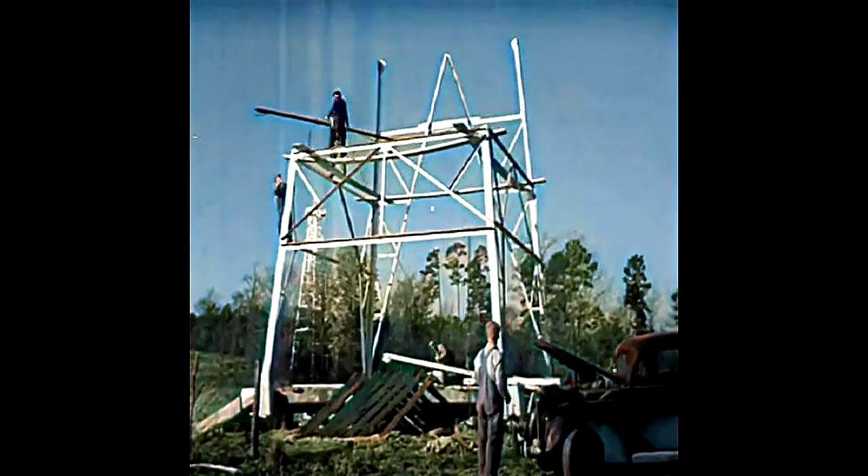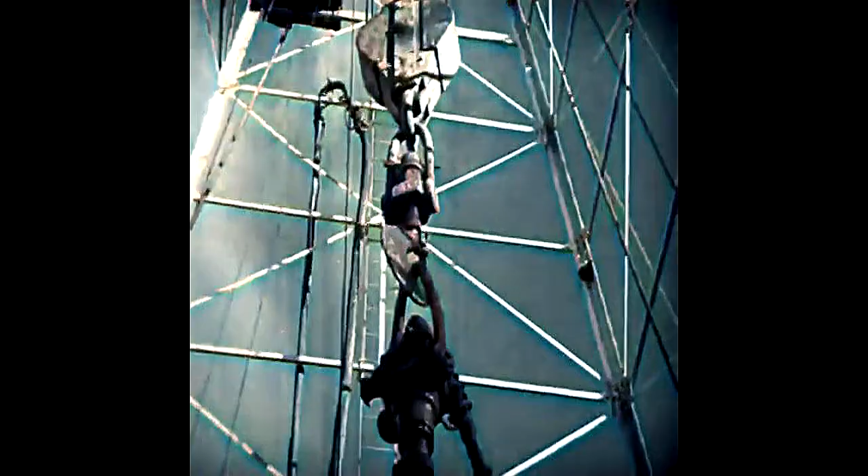A cellar is dug, and a rotary table to turn the drilling stem and the bit is set in place. Round and round the rotary goes, drilling deep down to oil. A steam engine drives the drilling mechanism. They're inserting a length of pipe, lengthening out the stem for deeper drilling. A new joint is waiting.

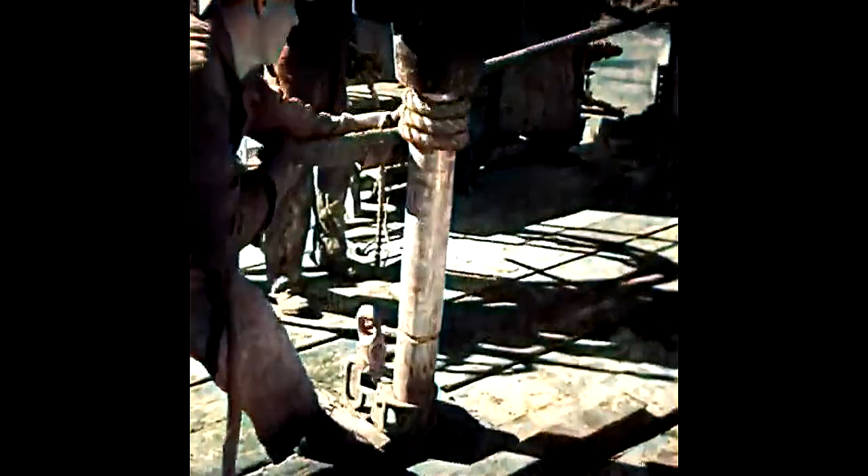Oil field workers are called drillers, roughnecks, roustabouts, rope chokers. The oil field treats our ears to odd and colorful names. Now the drilling stem has been lengthened, then round and round once more.

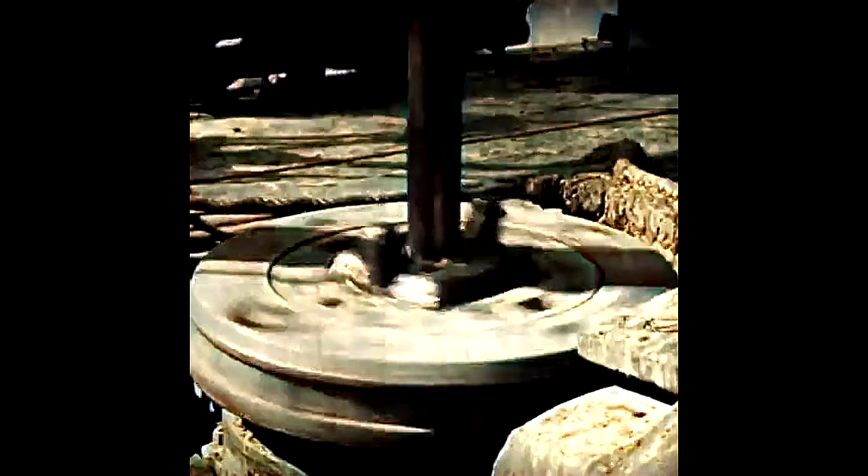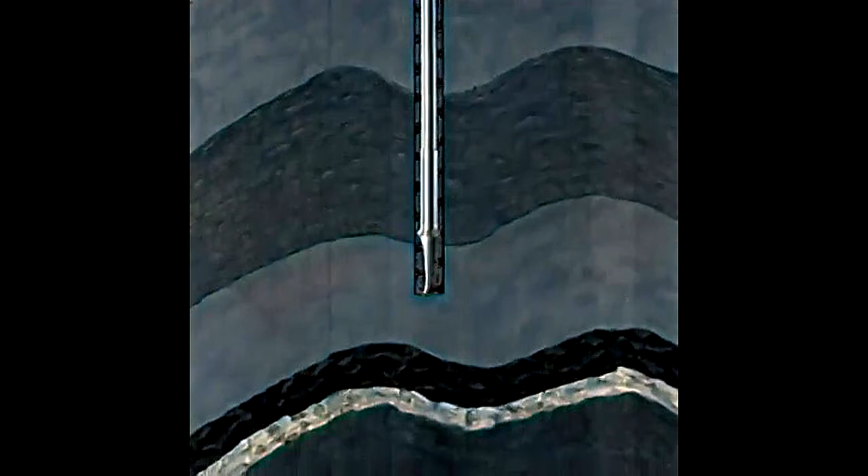Down through layers of sandstone, shale, limestone, down to astonishing depths. This well 5,000 feet. Some 10,000, 2 miles into the earth. And then, after weeks of drilling, fighting against natural obstacles, the drill at last reaches the oil sand, porous rock, which holds the oil much as a sponge holds water.

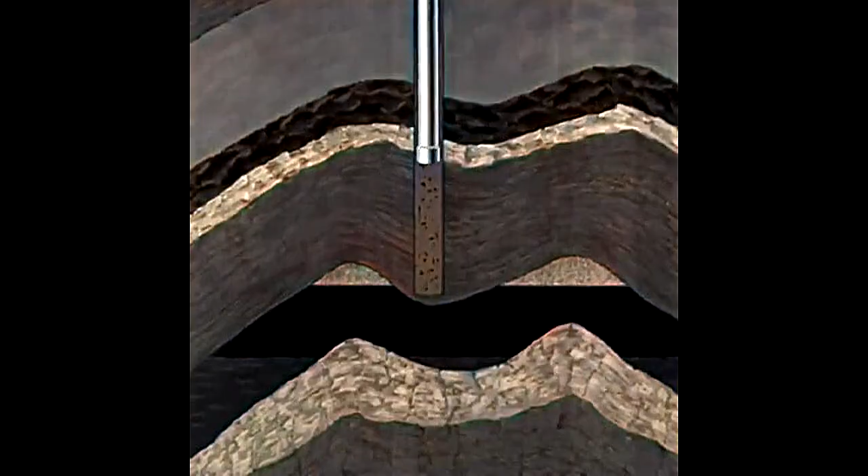Next, the casing is lowered to the bottom of the hole and cemented in position. Then drilled through the oil sand, and a screen is installed at the base of the casing. The screen extends down into the oil sand. The oil flows through the screen, up through the small pipe tubing to the surface.

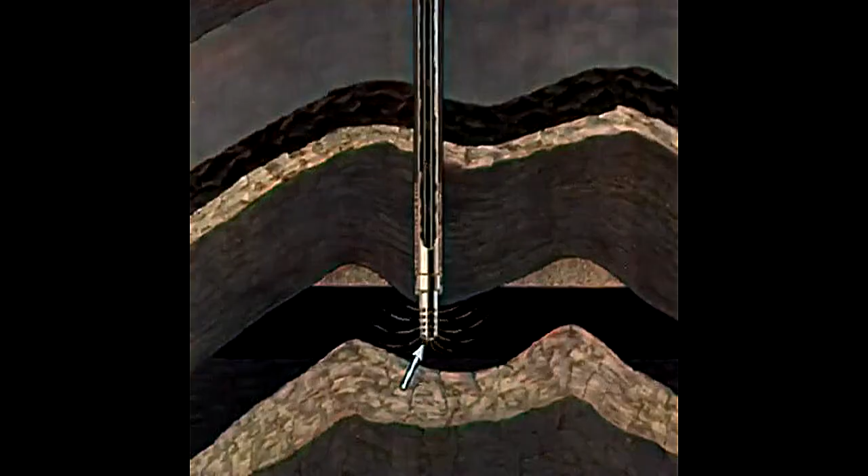So they've struck oil, and now the well must be cleaned of the mixture of drill mud and oil. Some wells flow of their own pressure. Others must be pumped, need power.

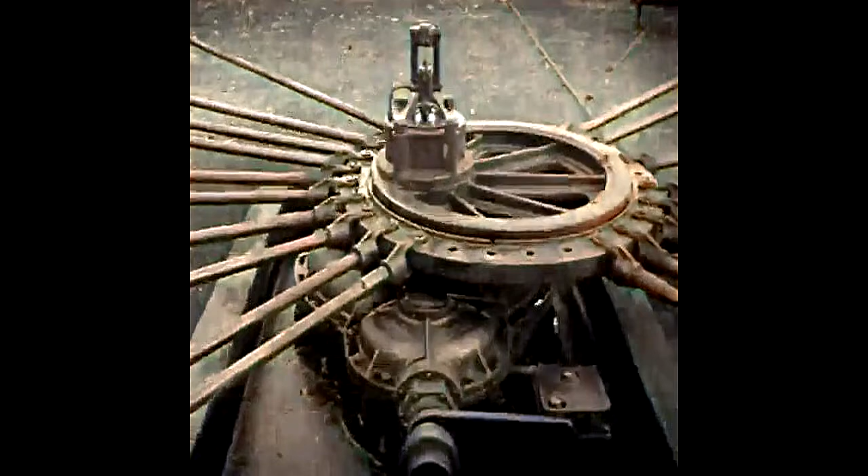The power is transmitted to groups of wells, the ever-swaying rocker arm, the rhythm of pumping, the unceasing heartbeat of the oil fields. A 24-well hookup is the height of oil field power, pumping black magic from 24 drillings in the earth, all at the same time, out of the ground.

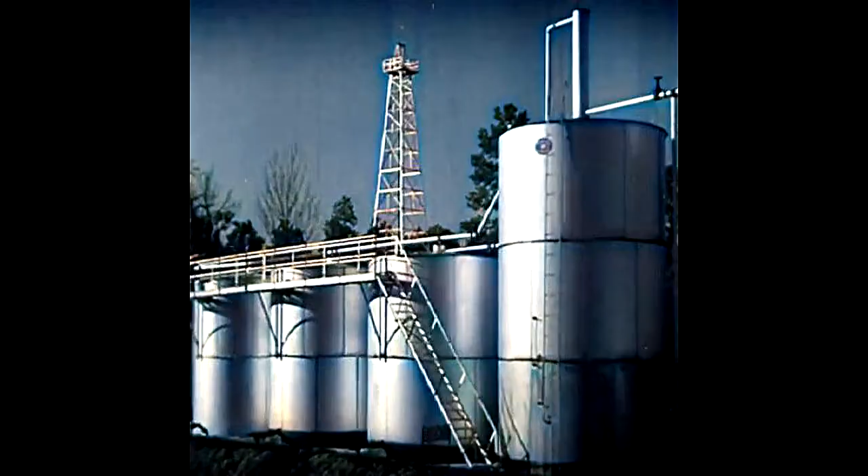The oil is cleaned of natural gas or water, which is combined with it. Next, the petroleum starts on its way through a great network of pipelines. There are powerful pumping stations every 40 or 50 miles to keep it moving along the lines. The lines of pipe, alive with racing oil, run through forests and over plains to these silver discs.

They're storage tanks where the oil rests briefly before it rides the waves in giant tankers, masterpieces of shipbuilding, those tankers of steel. The largest navigate the sea at 15 knots and carry 5.5 million gallons of oil. The voyage of oil to the refineries.

The refinery with its modern structures, technological towers, minarets of science, docks, office buildings, pageant of industry. Day after day, there is an endless flow of oil as the tankers discharge their liquid cargo.

Unloading oil is a vast operation of piping through huge hoses. Discharge pipes on the vessel and receiving lines on the dock are connected, and a cargo of 5 million gallons is discharged in less than 24 hours.

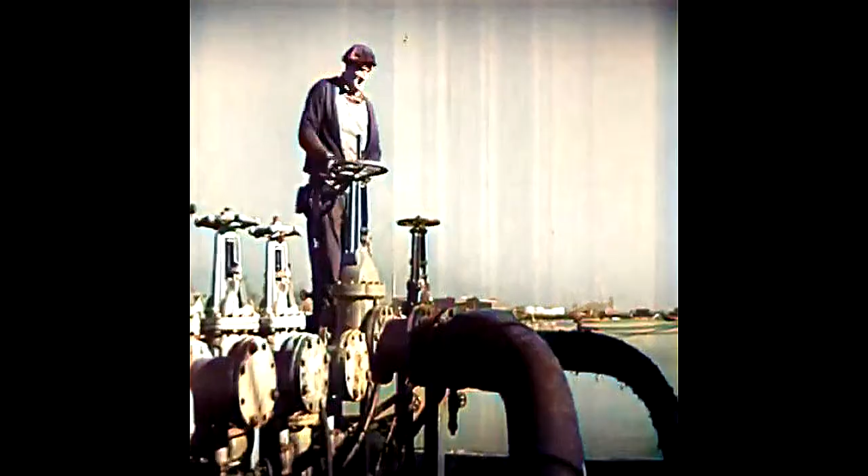No two cargoes of crude oil are alike, so each boatload must be stored in different tanks, and each batch must be processed individually, with laboratory tests to indicate the precise treatment for each.

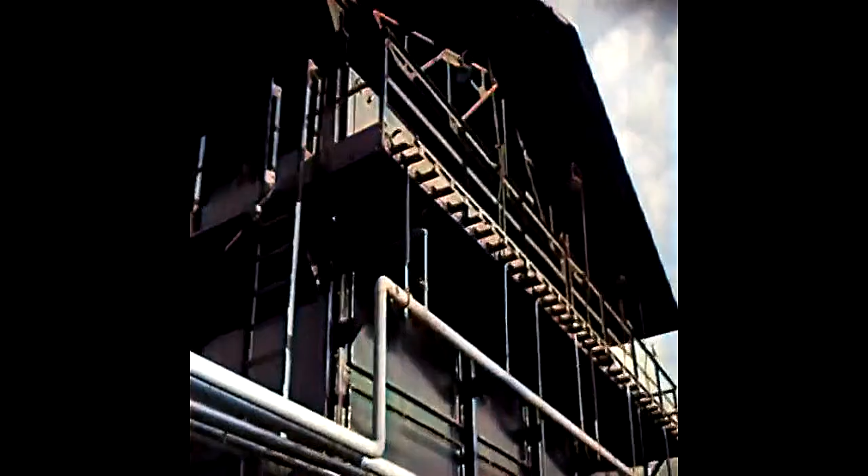That is embodied science. Those masses of strangely wrought steel, forests of stacks, glowering and hissing boilers, leaping and winking fireboxes. Intense heat, the flames roar in the furnace, yet the oil flows so fast the heat does not scorch it. And scientists wrest from the crude petroleum its tremendous power in the form of gasoline and other fuel oils.

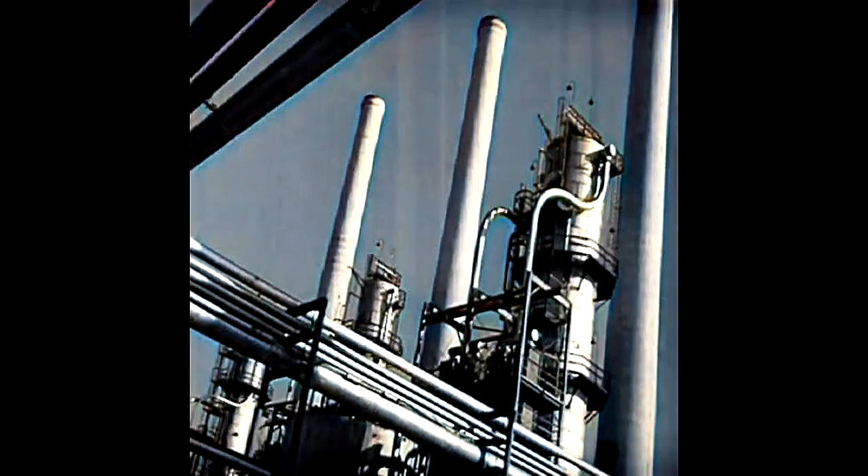And that's done in these towers called fractionating towers. They divide crude oil into the lighter and heavier parts. Those of different boiling points liquefy at different levels in the towers. Some lighter than gasoline liquefy at the top. Heavier parts liquefy further down. At the bottom are the heavy fuel oils, or the raw materials from which lubricating oils are made.

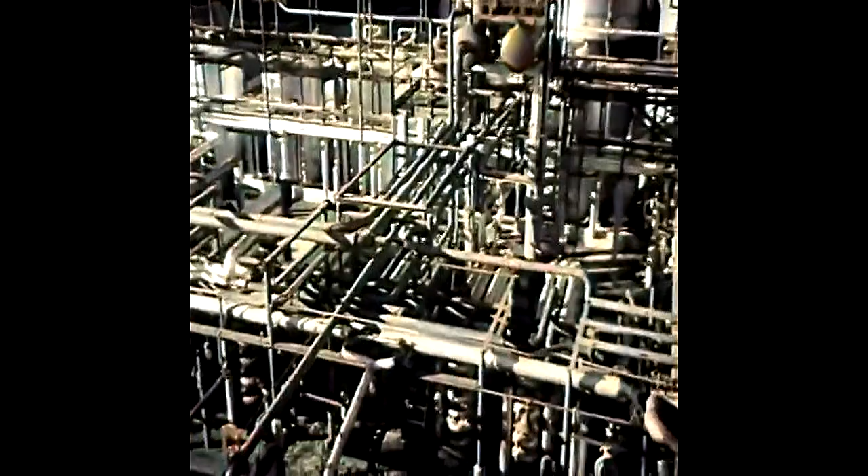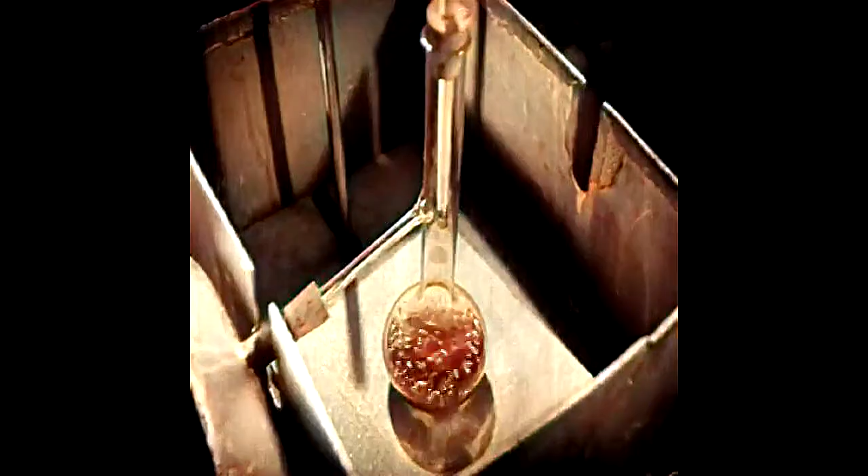When increasing use of motor cars pyramided the demand for gasoline to extraordinary heights, scientists were called upon to devise new methods. How could a greater proportion of gasoline be extracted from the crude oil than that obtained from the fractionating tower alone? To meet this challenge, the scientists turned to products other than gasoline which are drawn from the crude, studied their molecules, and found a way to change them, to turn them into gasoline.

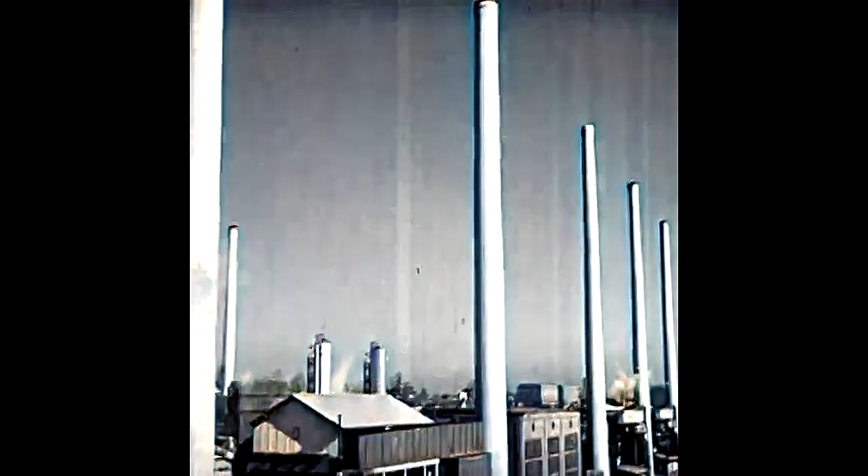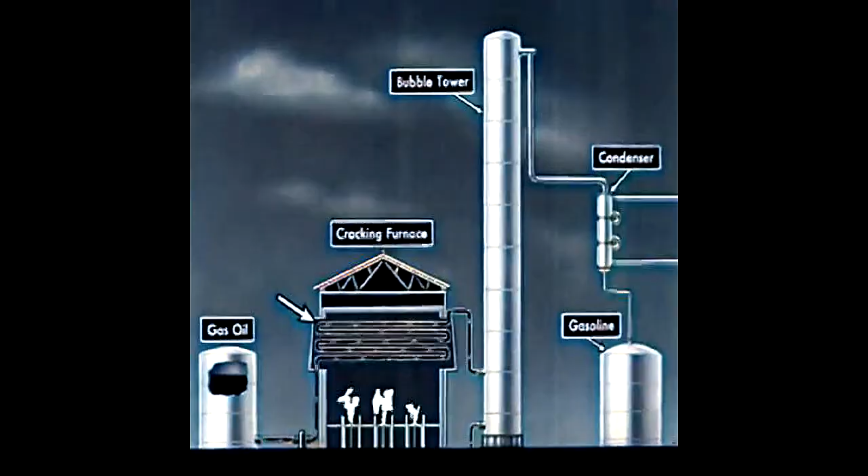The result was cracking. Let's look at a diagram of a cracking plant. Here we see how one part of petroleum that is not gasoline is converted into gasoline. Called gas oil, it is pumped through a pipe into a cracking furnace, heated to over 900 degrees under tremendous pressure, and the individual particles, molecules, are broken into smaller molecules, just as coal is broken under a hammer.

If we could see one of those molecules, it would look something like this. The hotter the molecule gets, the faster it wiggles, until finally it wiggles so fast it flies apart. The pieces shoot around at great speeds. They eventually find partners and form new and smaller molecules that look something like this.

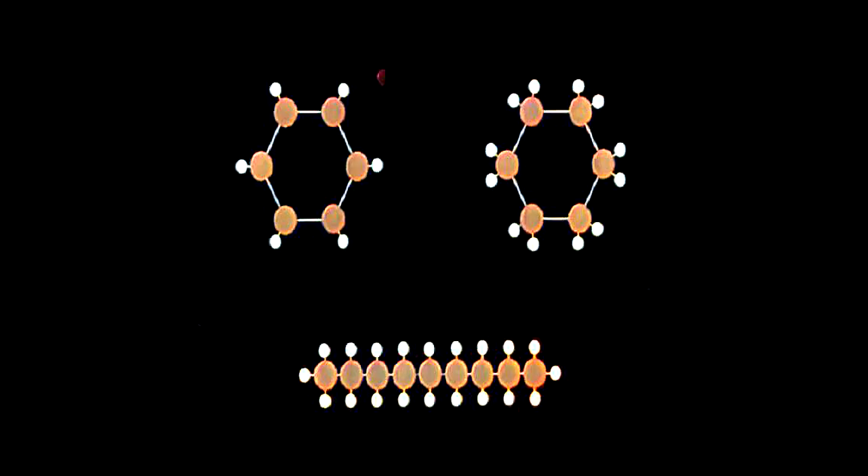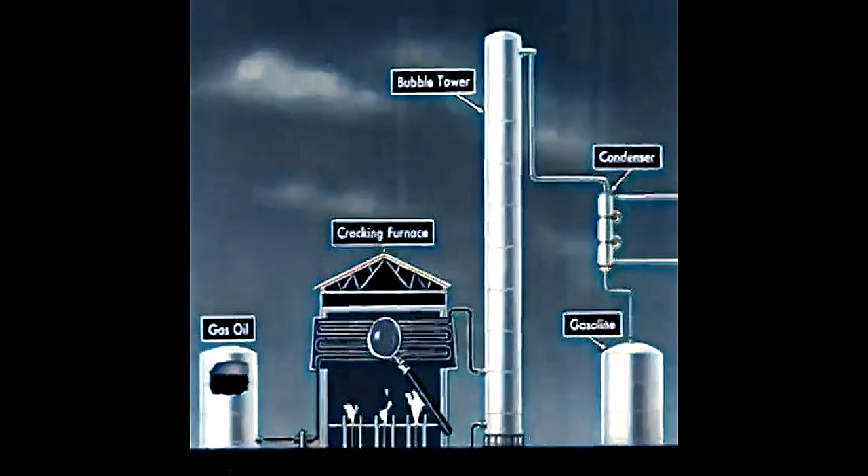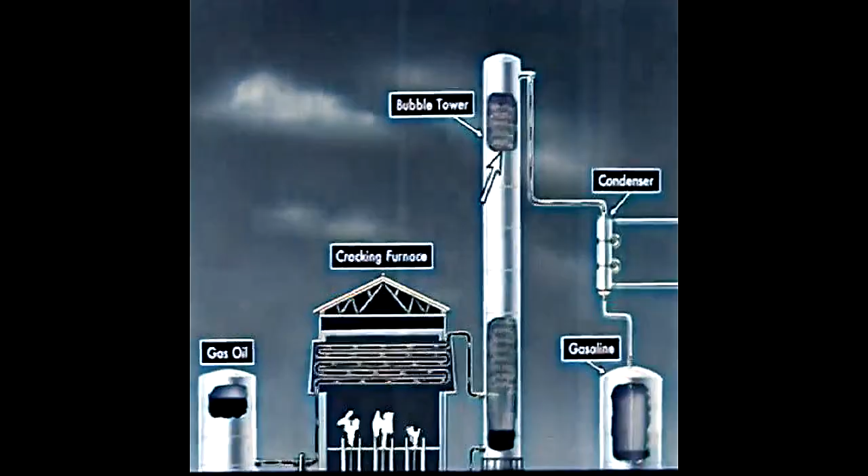These smaller molecules are now no longer gas oil, but are gasoline of high-powered, knockless quality. Some of the gas oil molecules do not fly apart and must be separated from the gasoline. This is done in the bubble tower. Here the big molecules, which are not gasoline, are held back and come out at the bottom as a liquid. The gasoline goes up the tower as a vapor, comes out at the top, and is condensed into liquid gasoline.

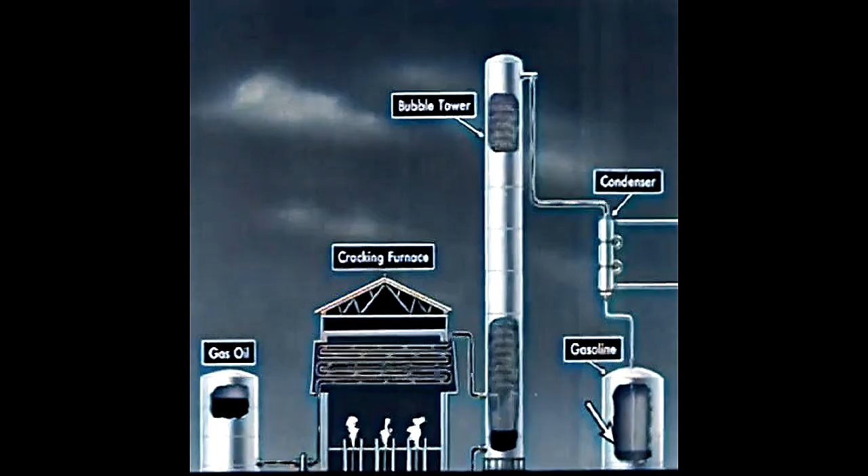Gasoline that gives more power to you. Experiment is the key to it all, and this is the experimental laboratory. In the making of powerful motor fuel, the control of temperatures is of extreme importance, and it is measured to an accuracy of 1/100th part of 1 degree.

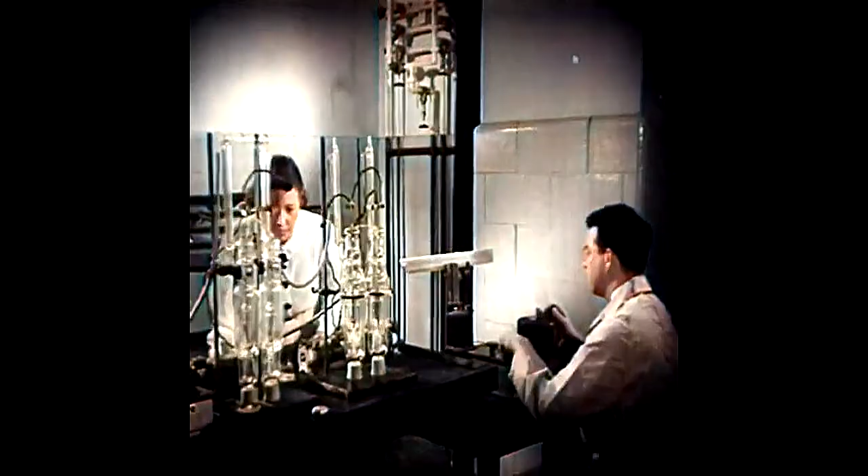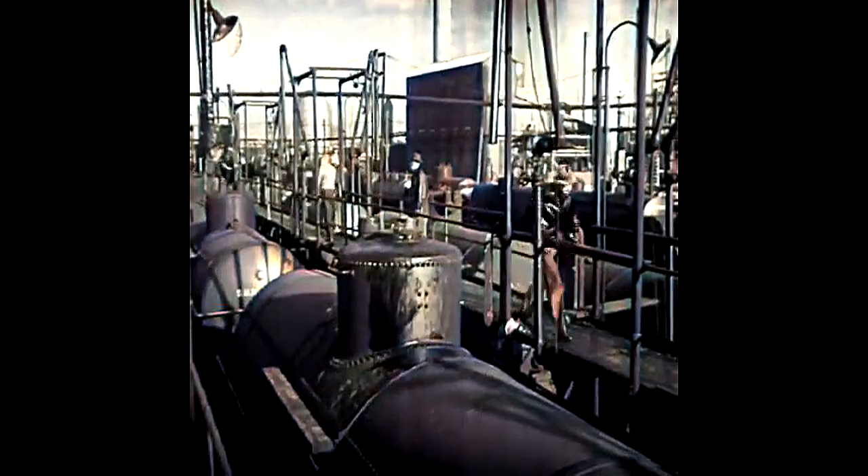Tank farm, to which the motor fuel goes from the refinery and then out to the nation by railroad tank car and by motor barge. Pipelines run their web-like nets under rivers, over mountains, carrying gasoline that goes into millions of gasoline tanks to generate billions of horsepower for the nation.

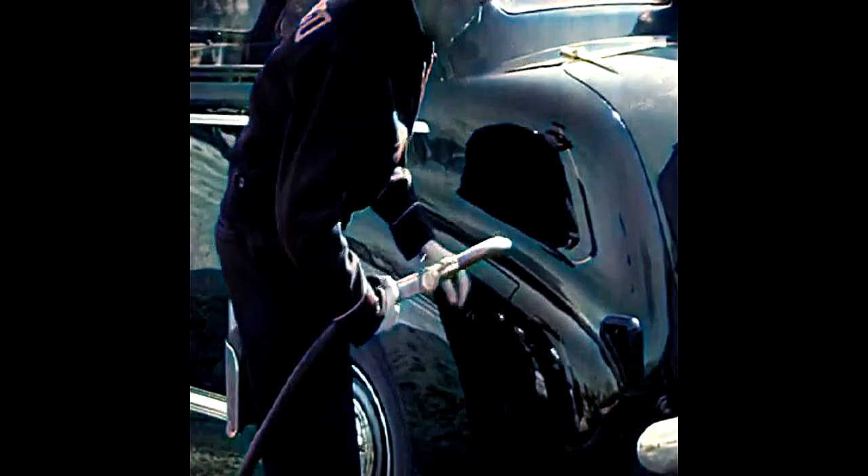Oil means horsepower in a horsepower-using world. Briefly, in 4 words, more power to you.